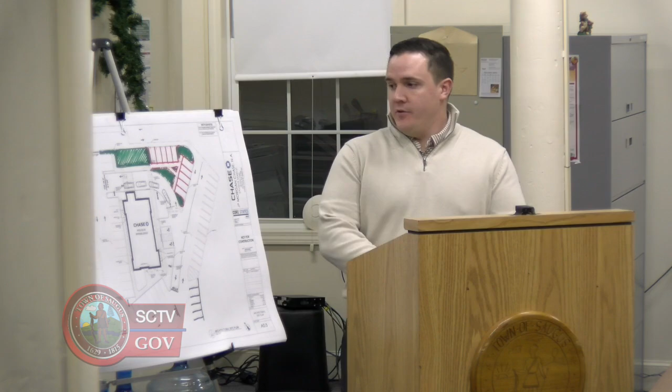Good evening, Nick Dewhurst with Bohler, here on behalf of the applicant JP Morgan Chase. I'm sure you remember, back in September, we got site plan approval for the proposed bank and drive-through at 156-180 Main Street. The proposed plan, focusing on this area here, proposed solely landscaping at this corner of the development. We've since been going through the building permit process, and the landlord was taking a deeper dive into the plans and requested that we provide additional parking specifically in this area.

So their idea was doing 5 spaces here and then 5 spaces here, which is what this sketch represents. It's really the only change to these plans. It doesn't really have any adverse effects on what was approved from a stormwater standpoint. The proposed development is still providing a significant amount of pervious surfaces that don't exist in the existing condition.

Doesn't affect anything from a zoning compliance standpoint as far as open space, impervious surfaces, parking. Of course, the site was adequately parked from a zoning perspective as approved, and this just increases that by providing additional parking spaces. Our hope is that we view this as sort of a minor modification, and our hopes are that you folks agree. So happy to answer any questions.

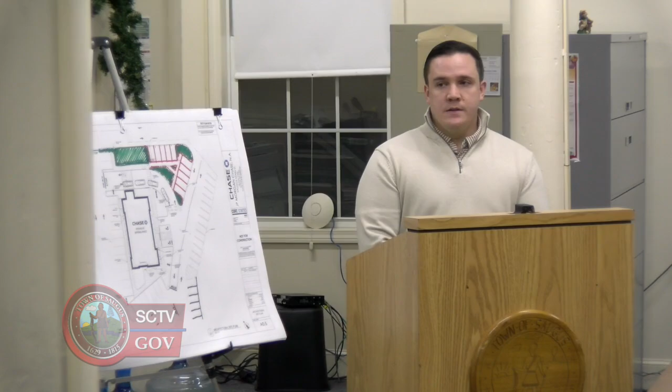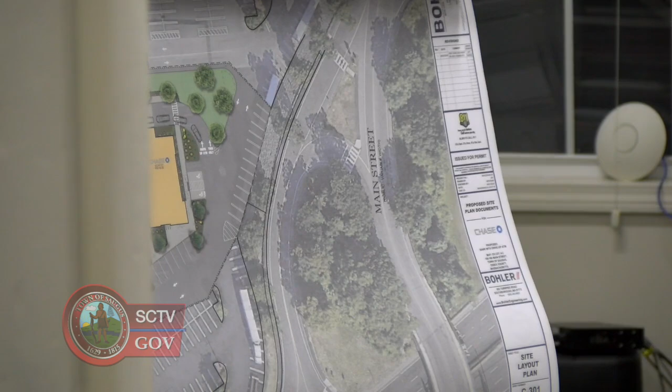Did you submit a plan to the board? Yes, I sent this plan over to Nancy. Okay. Mr. Chairman, do we have a copy of the plan that we approved? Yeah, I do. So this is a rendering of the approved site plan. You can see this was really all landscaping, grass, and then a handful of trees. We'll maintain the same amount of plantings and trees. We'll just relocate them around those parking spaces.

Through you, Mr. Chairman. Those spaces on each side of the roadway, are people going to pull in there and then back out into the throughway? The main roadway that goes through there? Yeah, and that's a good question. So the proposed condition does provide 5 spaces sort of in that main drive aisle. Aren't you guys concerned about somebody getting butt-ended up there? I travel that. Yeah, and I remember when we were out on site, I had the opportunity to see the traffic patterns out there. And candidly, it's the landlord that's proposing and asking for these additional spaces.

Do we have anything from the landlord that is given to you, for you to come here to ask us to revise a plan? This sketch is directly from them. I'm sure I can get something in writing from them. That'd be helpful. I think it's important that we have something. Mr. Chair, I missed the meeting where the final plan was approved. I'm just curious, was anything required within that area that they want to change?

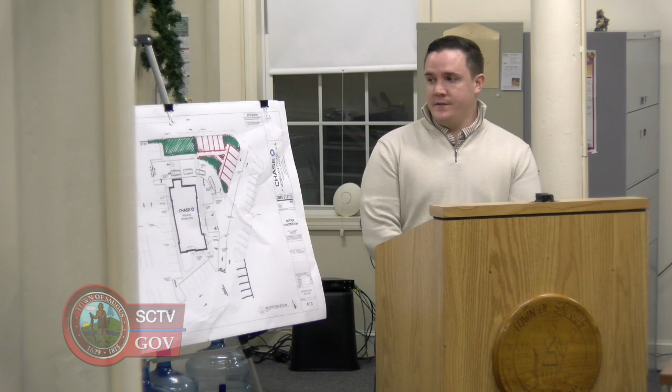So we were presented with, and correct me if I'm wrong, a great photo of landscaping, which I think enhances the bank, and now we're going back to parking. I don't know how those trees are gonna fit in that space if we take it away. Yeah, so you can see the green shaded area here, that is what's going to remain landscaping. So there is, in my mind, still a pretty substantial amount of green space up in that corner. And to answer your question, Richard, as I showed on this plan, we did have 4 trees in that area. I think 2 of them can stay where they are, and the other 2 can shift around, maybe one in this corner and one up in that corner.

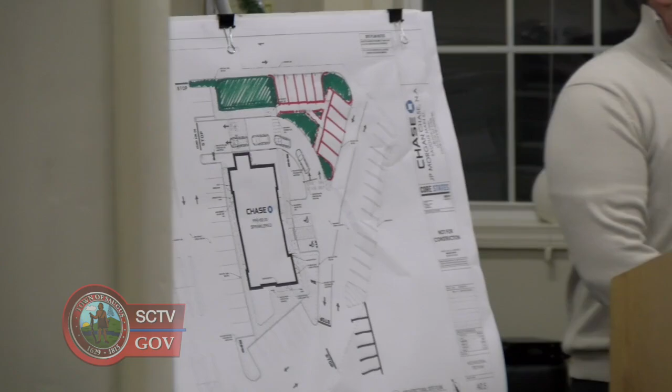So what does that do for flow and drainage? It really won't affect it. These spaces will grade this way. If you remember, there's sort of a ridge line at this area of the site. From here on, it flows up to the catch basins in the existing parking area, and down here, it all flows this way. So the spaces will just be pitched so it'll flow out and maintain the existing drainage patterns.

So what does it do to your stormwater? Now you've increased the amount of. Yep. So it doesn't trigger the requirement for any infiltration or anything like that. The reason being, and Beta agreed with our stormwater approach from a requirement standpoint, the site is entirely paved today. Has this been passed on to Beta? I have not shared this with Beta. But the site is entirely paved today, and we're adding a significant amount of pervious surfaces that will naturally decrease peak rates of runoff as well as improve water quality volume. Though this does decrease the amount of pervious being proposed, it by no means puts us beyond a threshold where it would require any additional stormwater improvements.

Mr. Chairman, sir, getting back to that plan. I'm sorry? Yeah, getting back to that plan right there. Since I'm a frequent user of that space up there, the Stop and Shop or whatever, that roadway can be dangerous in and of itself because you have supposedly a stop sign there where you have the rounded curve. Nobody ever stops.

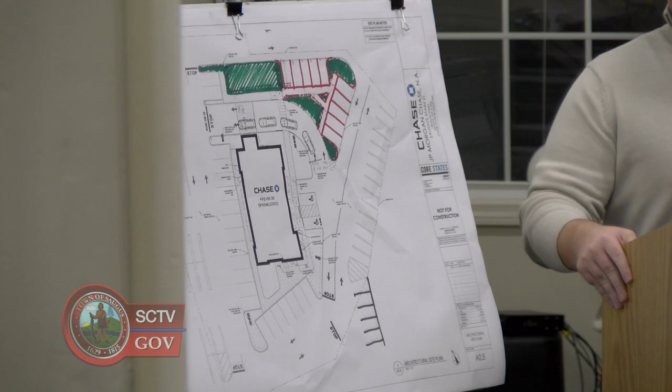I'm certainly not up in this plaza every day, but I don't think there's been any real issues with cars accessing those parking spaces from a safety standpoint. And I don't believe it's anything Beta or our traffic consultant specifically flagged in a report as being a problematic area. With these 5 spaces, I think we certainly can understand where you're coming from from a safety standpoint up there.

That's again, if it helps at all. Because the traffic, even the walkways you could run there, come into that drive-up. Yes. If you went to angle parking, not trying to do your design. Yeah. If we went to angle parking, so that they had to come into the Chase property, angle park, and then they'd be backing out into something that's a little bit less dangerous. I mean, you have to move a couple around. Got a lot of green space to the left side there.

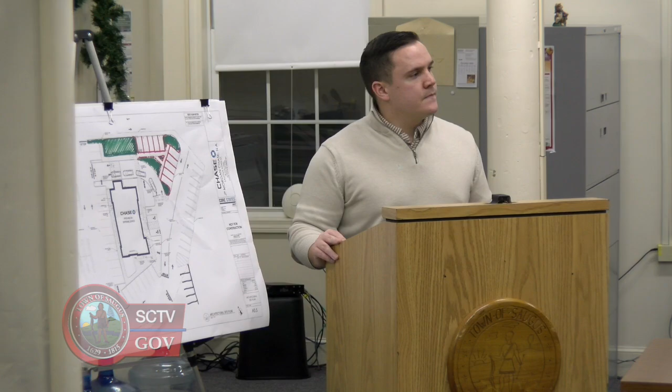Even if you took the corner and made 2 a little larger, put the green space down where you're taking them from, it's just, I hate to say it's a horrible design. Putting someone in that type of predicament. Because, yep. Does it happen now? Yeah, but it happens and it's wide open. Yep. So you have nothing, you put trees up there on that corner, now you're gonna block whatever they get to see. They gotta get up past the tree to make sure nothing's coming this way, although it is a lane on the other side, but yeah, it's just too many obstacles there.

Yep. Yeah, I mean, again, this sketch is directly from the landlord. Yep. I don't think the landlord wants to create any unsafe conditions within their own plaza. Yep. I guess it sounds like there's differing opinions as far as if it's unsafe or not. We understand the third party, and I think that was one of the first questions I had for you, Nick.

That is the parking lot for Wildwoods, which can get very busy on a Bruins game, Patriots game. Seems to bring a lot of hometown people to that establishment. Yep. And they park everywhere. So, and then after having a few beers, they come out, no one knows better than me, they go racing off. So, I'd like to have you put some input in it. I'd like for you to send it to, this is my personal again, send it to Beta and have them take a look at it and they can comment to us. But I'll open it up to the board for any other discussion.

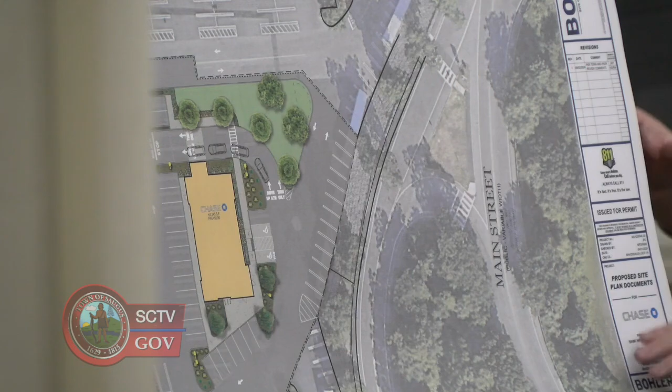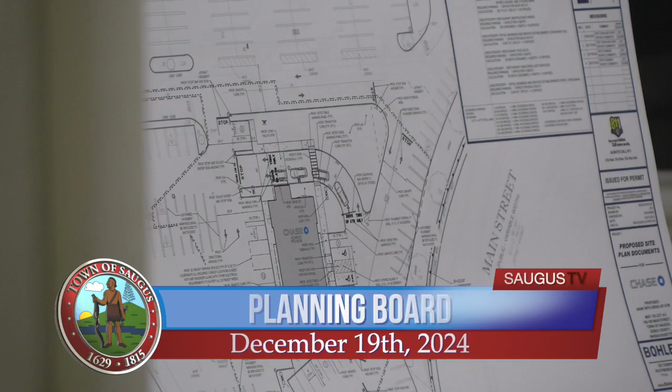Yeah, so this rendering's slightly outdated. One of our last iterations of the plan that was ultimately approved is actually this. It's a little less clear because it's our black and white site plan, but the stop controls were added. So there's a stop sign here, stop sign there, as well as a painted stop bar. So those are adopted in the approved plans. But do you see how those angled spaces would work with the flow of the traffic on the bank? So are you saying angled spaces up here, or?

Maybe with a curb, so that they can't pull out, they gotta come back out through the bank, which slows it down a little bit. The race doesn't go on. I mean, you had mentioned that the bank is closed at nighttime, the bank is closed on Sundays. So they'd be able to use the parking that exists within the bank. So it just doesn't give them the opportunity to squeal tires, back up, and then crack the car that's coming down, or vice versa. Yep. It's just too open right now.

And does the idea of designating these spaces for employee parking only help? It helps a little bit, but now you're putting the employees at risk too. If someone's had a stressful day and they come out, they're not thinking, they just back up, bang, before they know it. It's not so much them as it is the people that race through that parking lot. Yep.

I was gonna make a comment, Mr. Chairman. So the parking that faces the ramp going down to Route 1, on an average day today, it's not really used. We used to park the tractor trailers over there. So it hasn't been used; is it going to be used now? Yeah, it's going to be used now. People are pulling in there and walking over to your bank. So I think the other ten you're looking for is more than necessary.

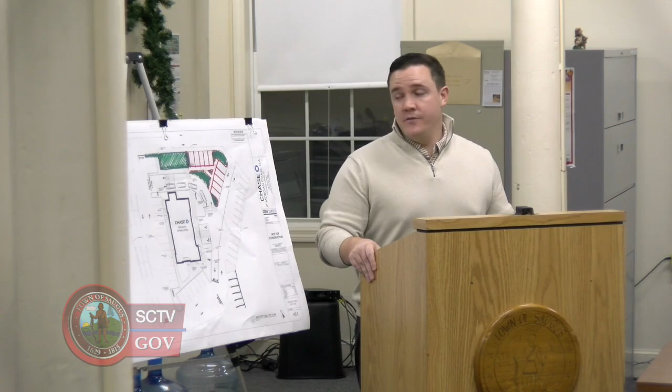So I think what we would ask is, and working through this with Beta, we're more than happy to do that, if it could be voted as a minor modification, and then we work through it with Beta, get Beta's approval, and work through that process administratively with planning and Beta, rather than deeming this a major. And the reason for that is we have filed for building permit. I believe they're looking to start construction out there within the next month or two. So time is of the essence.

This was a springtime project. So if that's what we mentioned during the permitting process, again, I believe we're sort of out of those conversations as far as timelines go. Well, not really, because now you have something that's different than what you originally had a projection on. So it is a change. It's up to the board to vote whether it's minor or major. But I would ask Kevin if he has any input.

I'm wondering if the green space was part of the original design or a product of some review comments from the board. It was a product of review comments from the board, which when they presented that made it look a little bit more appealing. We had asked them to turn the bank around so that it was facing Route 1, but that was denied by the bank itself. They didn't want to do that. So we're looking for a little bit of enhancement to a big open black parking lot. And Nick did a good job with it, but now it's being taken away. Yeah, that's how I'm looking at it. They're proposing adding parking, but from the other direction, it's deleting some of this green space that may have been a deciding factor.

One other thing about it is I've looked at the plans and we've had some talk. It's very close to that 1 acre. I feel like during construction it is going to be bigger than 1 acre, which might trigger some more stormwater requirements. I don't know, but from a deletion of an approved green space, I think we need to not only evaluate the numbers in terms of the drainage, but the aesthetics and what we thought we were getting as a product, because now you have 5 dissected pieces of green space as opposed to the conceptual design.

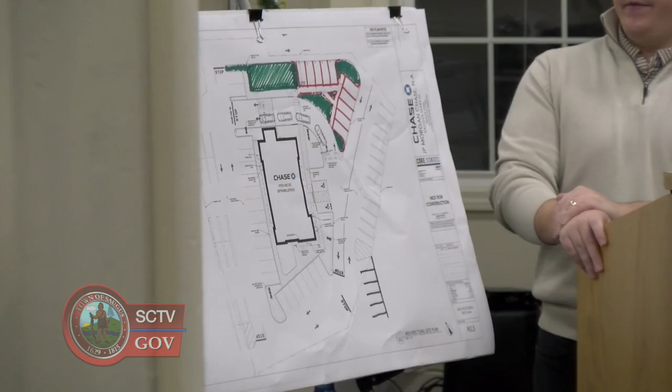What it's really there for, and we do a lot of drive-through programming, whether it's quick service restaurants or banks, and that bypass lane is typically looked at as a positive thing from a safety standpoint. If you're in the queue and for whatever reason you need to leave, if you have an emergency, you can kind of exit that way. So that's mainly what it's for. It's not necessarily for, if you park here, you're gonna exit the site that way. No.

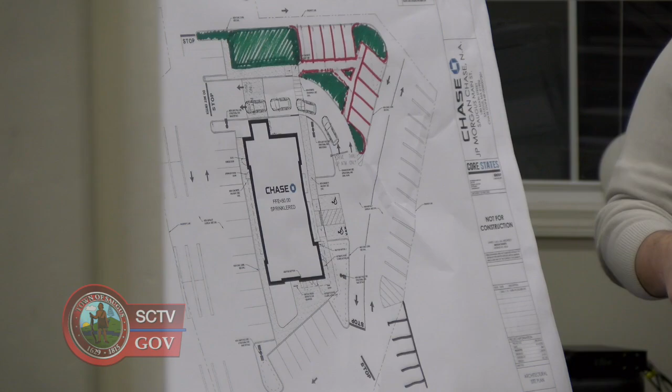I don't know, Mr. Chairman, what else you want to do with this, but I'd like to see another rendering. I'd like to see a letter from the landlord himself making the request. I'm sure this is shot from the hip. Like you said, this is the landlord that did this. Sure, he has an engineer or someone behind him. But I'd like to see what you can come up with to see if we can rectify this a little bit.

It won't go to a vote tonight because it's not a public hearing, whether it's minor or major. This is just an informal discussion. So this gives you time. The faster you do your homework, get back on the board with us, then we can keep this moving in the right direction.

It was determined that this site will be fully enclosed for public safety during construction, correct? Yes. Okay. And now we're pushing the fence right back out to the road again. Yeah, well, our limit of disturbance is right along here anyway, so it wouldn't change any construction fencing limits. But construction materials, they're gonna be up there where those 10 parking spots are, while they do the main building. Do you think that they may have to do some hammering up there? I can't say.

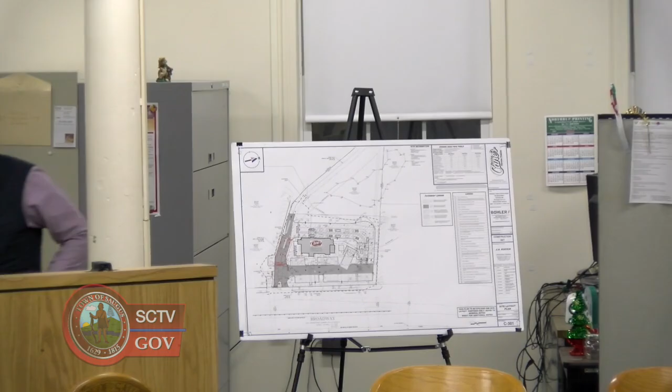Matt Ashley with Bohler here on behalf of the applicant, Raising Cane's, for the previously approved Raising Cane's development.

Thanks for everyone being here the week before Christmas. Appreciate it, and taking a look at this.

So we're here today for a couple of minor updates for the 799 Broadway Raising Cane's development. I'll walk you through both of the updates, kind of where they came from, what we're proposing, the differences. We did submit fully updated plans to the board. And then also we produced these red line plans so you can easily see what's changing between what was previously approved and what we're proposing now.

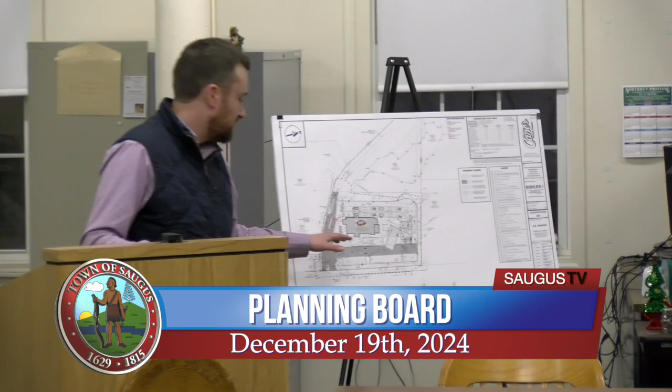So I'll start with, I'm going to call it the driveway modification. So this was a result of some ongoing coordination with the abutting restaurant use next door. We previously proposed some modifications on the adjacent property, which were kind of on the property line here and how it would intersect. At the time when we were working with them, that's what we thought was the best and most appropriate action.

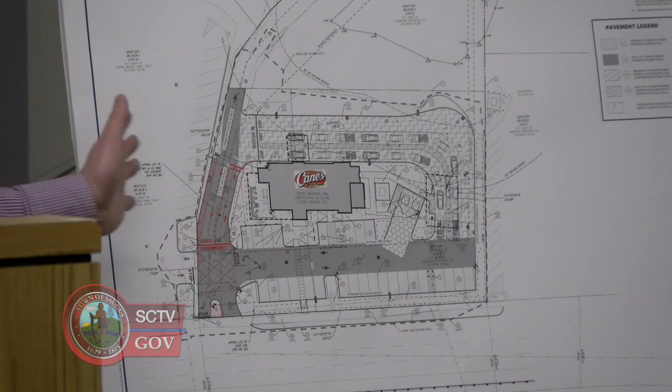As construction started getting going, and obviously really far into it now, those views were kind of changed from what was wanted from the abutting property owner and operator. So working with them, we came up with the proposed plan that you see before you today. It really keeps the same intent of everything, and it'll largely keep what's out there in the existing condition today, which is their preference. But essentially all it is is shifting the drive aisle over slightly closer to the Raising Cane's, giving a little further separation from the adjacent use and the parking spots that they have over there, and just realigning the initial intersection up front to really what it is.

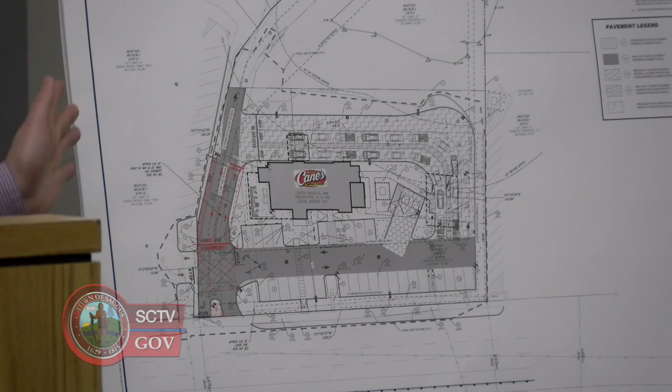So if you do come in on the Raising Cane's property, it's a quick left over into the Route 1 Grill House area, which would just be a one-way over into that way now instead of a two-way, so traffic would just go over that way. All the updates proposed are contained on site, and really it's just keeping what's out there on the adjacent property. It is their property, so respecting their wishes, and just some minor updates on our side shifting everything over.

The second item we have here is the proposed sewer connection. Initially what was proposed for the Raising Cane's development was a 6-inch gravity connection from the development out behind the Sullivan Tire operation to an existing sewer manhole. We really looked at this at length. It's a decently long run, and we worked with the previous town engineer at length. We went out, we GPR'd, we did SUE, we did test pits, we did potholes, we videoed every line that we found out there, and came up with a plan that we were both comfortable with and we thought was the best approach, doing a gravity system connection.

Like construction projects go, of course, the contractor out there was doing some more GPR on the route once he got everything staked out, and of course there was an unidentified electric line that came just off of our property there. We did pick up something in that area before, and it literally falls right on top of the existing stormwater pipe out there. So we thought it was the stormwater pipe; it ended up being 2 items out there. We thought we had it resolved, and really couldn't get around it. So we tried to look at other gravity options, but the end result, the best approach, and certainly not the cheapest, is to now propose an on-site pump station out there.

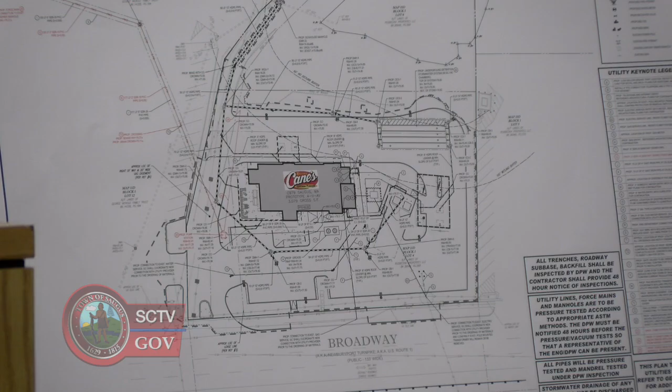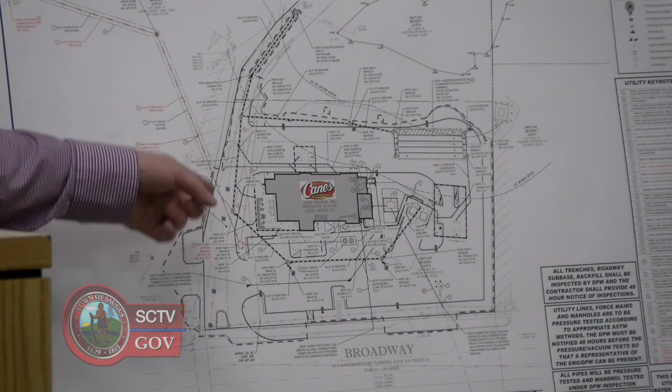So essentially what we are proposing is we take the initial sewer manhole 1, that'll be converted into a pump chamber that will house 2 dual operating pumps, so they'll rotate every cycle, so no one pump is becoming stagnant at any time. They're always getting exercised daily. Anything prior to that, the gravity line coming across the front, the grease trap, that's all going to be the same. The pump station will be located past that, and then it'll go into a 2-inch force main, same exact route in the recorded easement that everyone's seen before, discharging to the same location.

So some other important details that I'm sure you're wondering: this will always be maintained and operated privately, so this wouldn't be the town's responsibility. This would be the applicant's responsibility to maintain this.

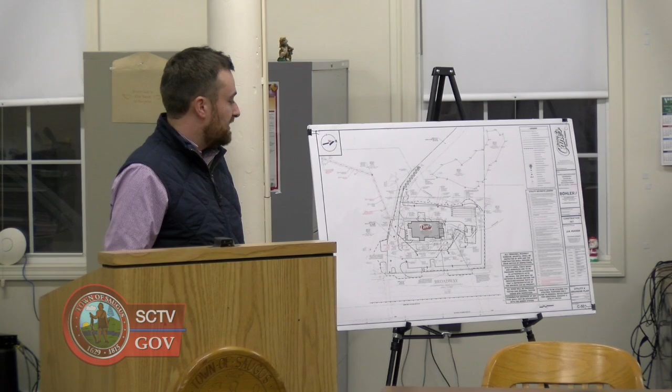We also supplied over to the town an O&M plan for it, and what that would look like in maintenance. And I think one of the additional comments we got was just making sure it does get maintained, so it does stay on the site and maintained, and we'd be happy to submit reports, I think, consistent with like a grease trap or anything else like that, just so the town knows that the applicant is maintaining the pump station correctly and frequently.

And then the benefit to the adjacent landowner as well is now that instead of having a 6-inch pipe, we just have a 2-inch little force main. We're reducing the amount of structures, so we'll be getting rid of the sewer manhole 2. That'll just be a 45-degree bend, and all the bends were accounted for in the pump station design. And it'll be a much quicker construction.

What type of restriction are you planning on in that 45-degree level? Restriction? 2-inch line? What type of restriction? What does that mean? Sorry. Well, the flow from the 2-inch force main, putting it into a 45-degree angle rather than a sweep. Oh, I forget the exact equivalent length, but for each bend, there is an equivalent length that you have to count for like a head loss for the pumps, and that was taken into account with each of the bends. So who's designed the pump system? It is the pump station designer, who's also the one that's going to be constructing it as well.

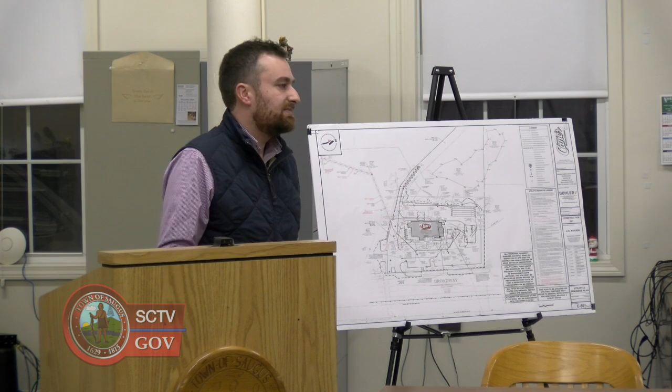And has Steve Bowley from Tetra Tech been informed of this? I believe the on-site inspections that they have, they've been talking about it out there as well. They haven't got any word back to us in the last report. No, they haven't started constructing it yet, so I don't think they would have anything in their report. And then one last item too is just this, it would maintain exactly where it was before, and then it would just be a lot less intrusive for the neighbor here. We're gonna eliminate that manhole.

How is it gonna be maintained? Just like a normal pump station, there will be cleanouts on either side, in the pump chamber and at the exit, and that's typically how they would maintain it. So what is the length of the run, if I may, from point to point? From where it ties into the town system, from where the ejection pit is? So there's two lengths. We have 135 and 177, so roughly a little more than 300 linear feet. With no catch basins or cleanouts? No, it's a pretty short length typically for a system like this. It's nothing too abnormal that we've seen.

I think Mr. Nickley will testify, being in the restaurant business myself for 27 years, having something that was half the distance created tons of problems. Mm-hmm. So I don't agree with that. That's why it's designed by the people that have designed the system. So that was submitted. It's in the back of our details. They have the full pump station, the O&M maintenance, for our restaurant use. Obviously not our preference. We wanted to do gravity, but under these circumstances, if anything else does come up, it'll be under pressure, so we can navigate around anything that could potentially be on the site. But the contractor's been pretty diligent about really looking into this area to make sure that's not going to come up again.